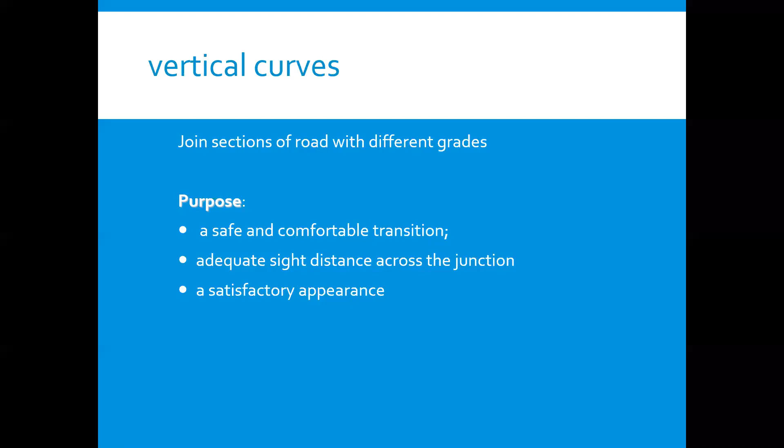Vertical curves are normally used to join sections of road with different grades. The purpose of vertical curves is to provide a safe, comfortable transition from one grade to the next, adequate sight distance across the junction of two grades, and satisfactory appearance. The most commonly used form of vertical curve is a parabola. This form provides a constant rate of change of vertical acceleration for vehicles and is relatively easy for calculation of setting out points. Most vertical curves can be designed using the following formula,

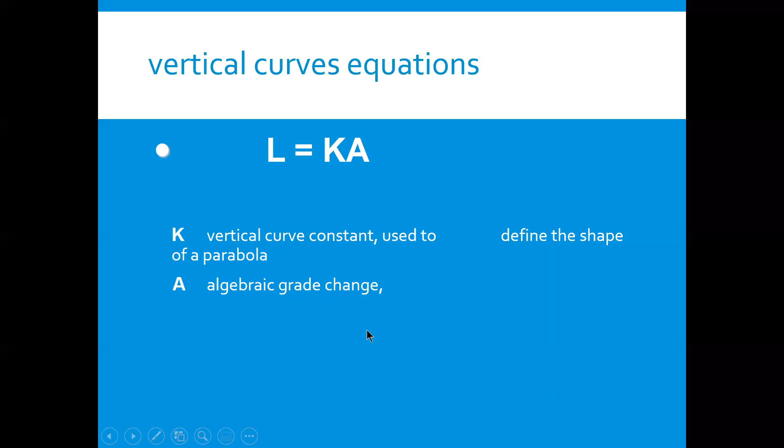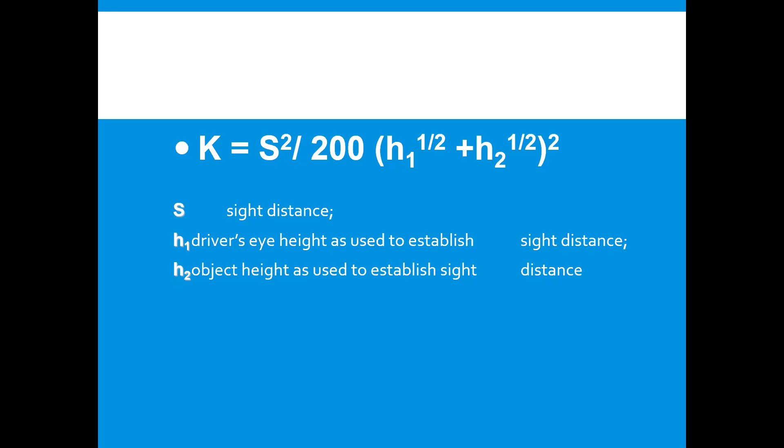where K is a vertical curve constant used to define the shape of a parabola, and A is the algebraic grade change. Okay. The vertical curve constant used to define the shape of a parabola is expressed using the formula shown on this slide.

Types of vertical curves: two, crest and sag. The lengths of crest vertical curves are usually governed by the need to provide stopping sight distance or approach sight distance at the operating speed. Crest vertical curves are shown on this slide.

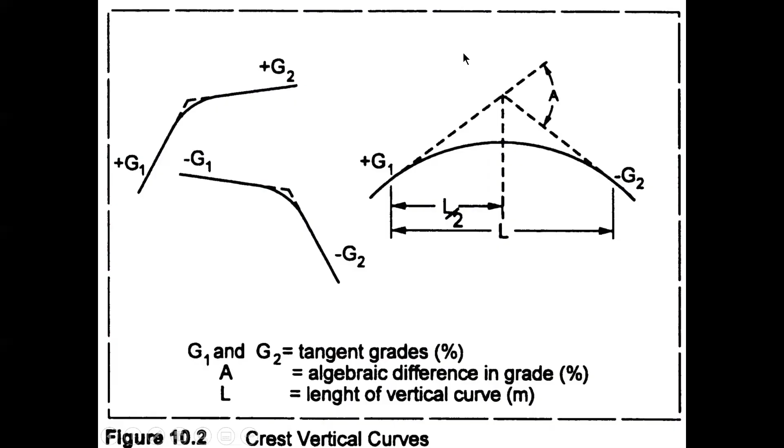Sag vertical curves, shown on this slide, are generally considered less critical from a safety perspective than crest vertical curves. The length used for the sag curve affects the appearance of the road, and in the case of a short sag curve, it can affect the comfort of the ride.

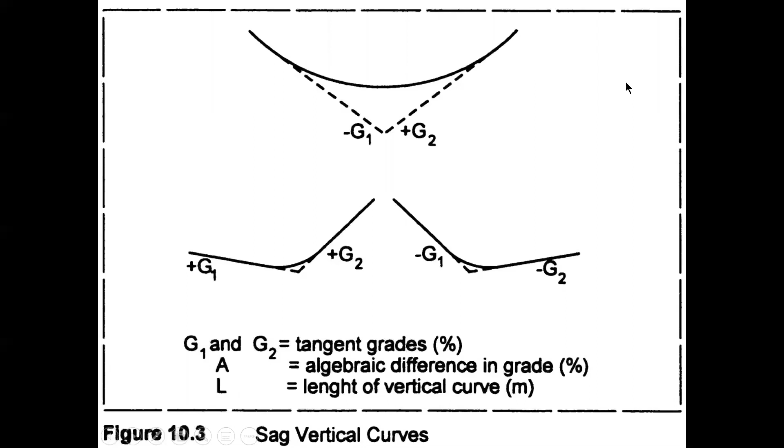In geometric design of major urban roads, it's vitally important to coordinate the horizontal and vertical alignment. Coordination means that the horizontal and vertical curves should either be completely superimposed or completely separated. The related horizontal and vertical elements should be of a similar length, with the vertical curve contained within the horizontal curve. This arrangement should produce the most pleasing, flowing, three-dimensional result, which is more likely to be in harmony with

the natural landform. However, in urban situations, it is frequently the case that such aesthetic considerations will be very difficult or expensive to apply or to achieve. Many urban roads are developed by widening established streets or by developing improvements on existing alignments. In consequence, the existing street locations and levels and abutting developments will exert a strong influence on the alignment of major urban roads.

Notwithstanding, the following relationships between the horizontal and vertical alignments should be applied to the design where possible for safety, aesthetics, and drainage reasons. A crest can obscure the horizontal alignment and the severity of the horizontal curve. Minimum radius horizontal curves should not therefore be used within crest vertical curves.

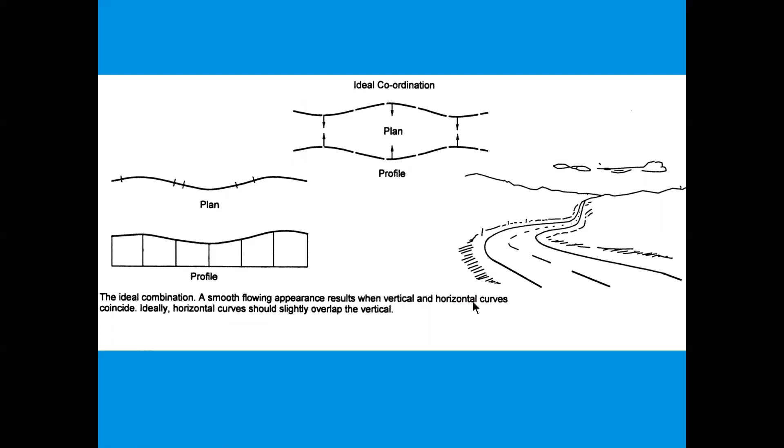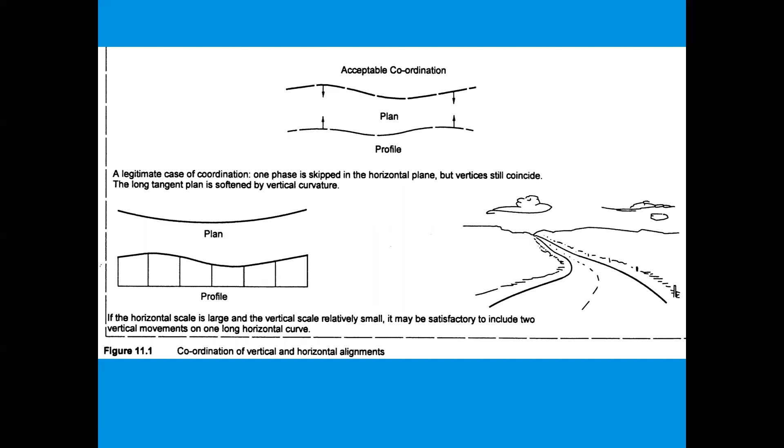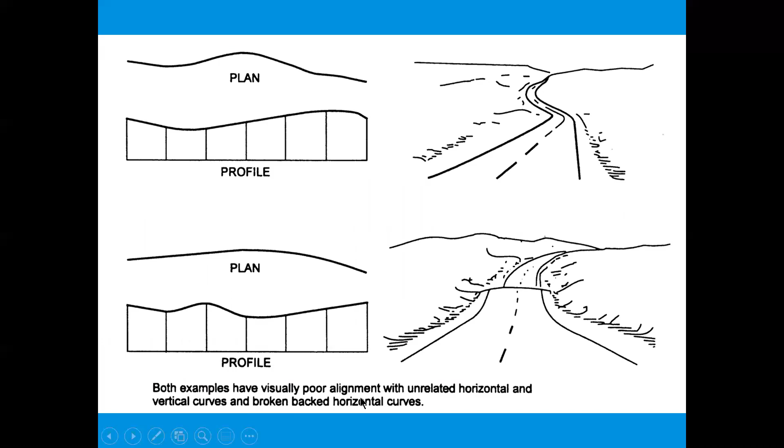The next slide is showing the acceptable coordination. If the horizontal scale is large and the vertical scale relatively small, it may be satisfactory to include two vertical movements on one long horizontal curve. And both examples have visually poor alignments, as you can see, with unrelated horizontal and vertical curves and broken back horizontal curves.

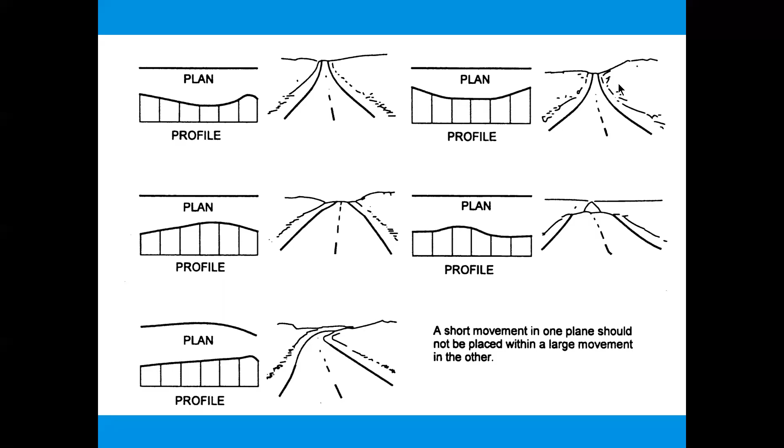Cross-section elements. The selection of cross-section elements for major urban roads is an iterative process seeking to optimize function, safety, environmental impact, economy, and aesthetics. Cross-section elements are discussed on my next slides. They are traffic lanes, kerb and channels, shoulders, medians, outer separators, and urban borders, footpaths and nature strips.